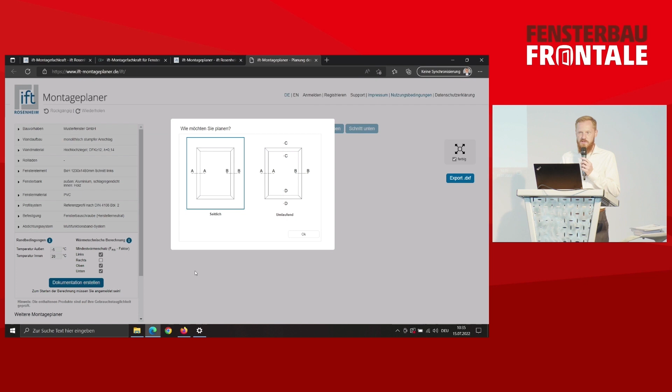Just to explain briefly, what is that actually? Well, this is an intelligent configurator in order to plan the connections of individual construction components. All of this is also very easy to use. It is basically not in need of any particular specialist knowledge. Now, certainly, of course, it makes sense to know your way around what you're dealing with, but regarding the use case and the utilization, it is very simple, and you can also try around things.

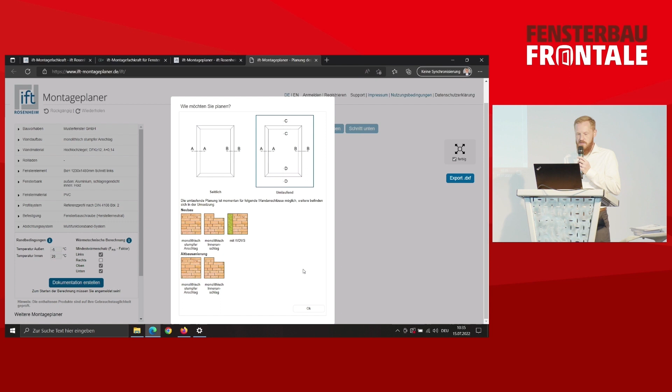Now, we first check in the program whether we want to go around, or what the actual approach is. And you can already see an overview. On the left-hand side, you have the menu. This is the different process. And the end product of all of this is the ift installation pass, or the assembly and installation documentation. This summarizes everything - you've basically proven how you've actually planned the installation.

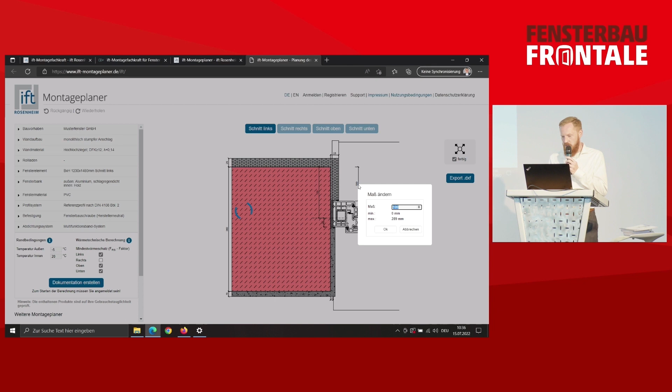Then, of course, you can also see the individual buttons, and you can basically change anything, both in terms of dimensions as well as the window positioning. You can change that dynamically. You can see that here.

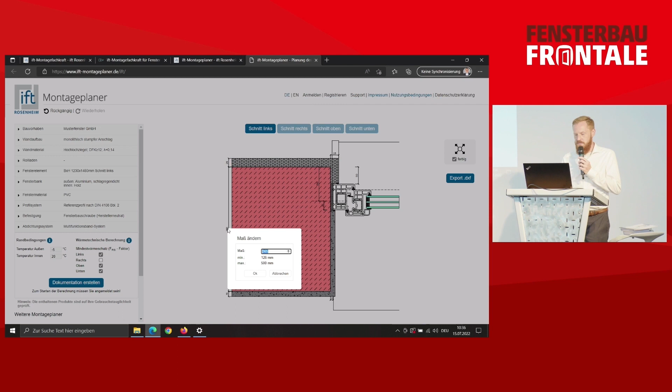We can, for example, push it to the outside, further to the inside. We can change the thickness of the walls, depending on what we need, of course, the thickness of the plaster. In the database, in the background, we also have the heat conductivity in there, and we're using this for a physical calculation to make sure the heat insulation ordinance is fulfilled or not. And then we also have a reference profile, a neutral profile, if you will. You can also have manufacturer-specific profiles. So, of course, we also have the important ones in there.

So, for example, you can also choose the vertical loads, and it's really also about the dimensioning of the fixing units. Then under construction project, we can define where that actually is. We can also align the wind load, which is necessary for the dimensioning of these fixings. And then you can see that within just a couple of seconds, I've actually determined the wind load in Rosenheim for our imaginary construction here. Now, if you've never done that, this is definitely going to keep you up for about half a day just to get that information. It's already in there, and that feature alone is well worth it. It makes your work in the day-to-day a lot easier.

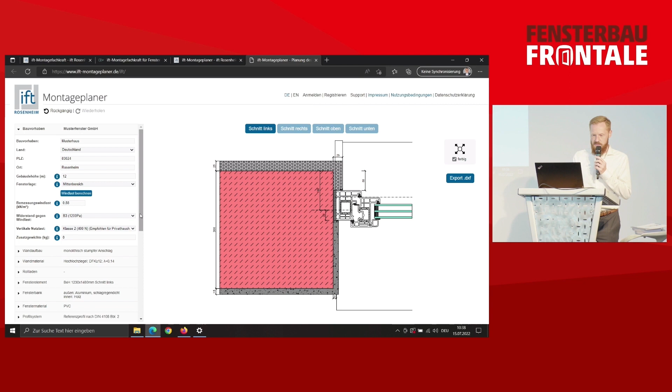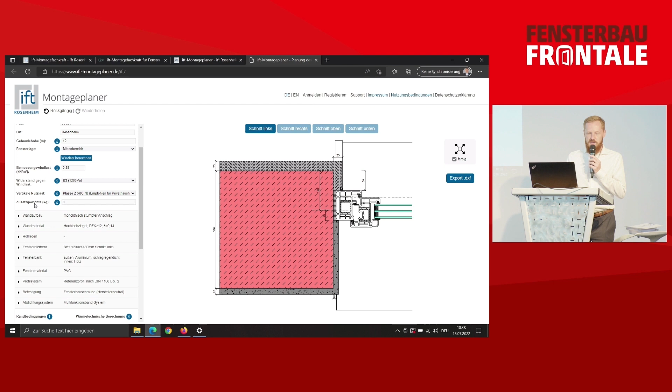So I'm also going to be seeing the vertical use load. This is something that definitely also puts a burden on the wing. This, of course, needs to be transferred into the actual wall. So you can see I've selected private households here. And then in the next menu item, we can also add additional weights, like, for example, to calculate the element weights.

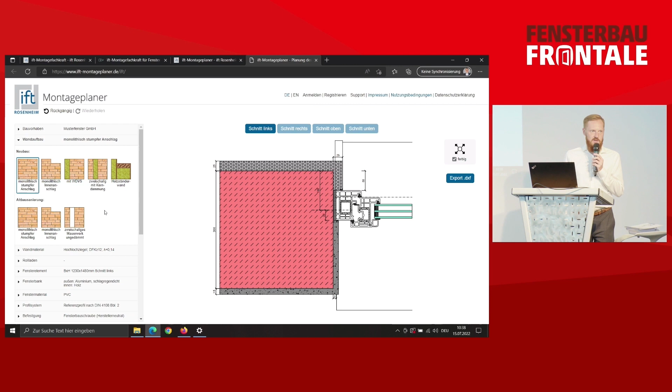And then, of course, we can see the wall construction. We have the respective construction that we always use in Germany. We can select all of those different things. So let's just look at that based on the WDVS example. I'm again choosing the circumference and the planning, and our technical drawing in the middle automatically adjusts to the information. And of course, we can continue to change all of that. We can, for example, change the window position yet again very easily, and look at the individual cross section. So here you can see the technical drawing for the top and the bottom.

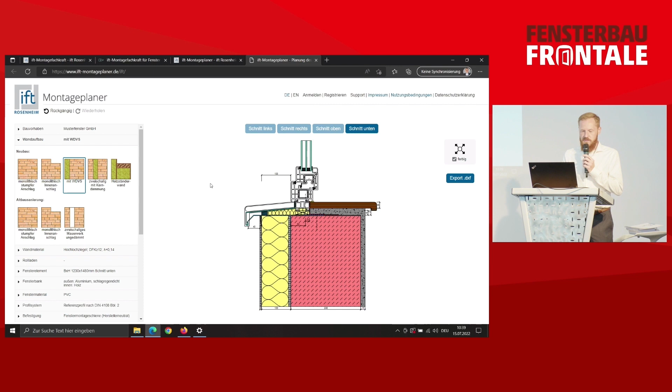This is relatively new in the program. We're continuing to enhance the capabilities—these are very big projects when it comes to the actual programming. We're also working on adding new features all the time, like I just said.

The next menu item is the wall material, which I've already mentioned. You can select any material you want. We're currently in an IFT neutral version, so we're working in a product-neutral way. The program tells you we need a window construction, a neutral one, and then you'll need to contact the respective manufacturer and choose the right product. However, below the menu there are also some links.

You can see that here—this is on the specific versions of the IFT planner. This is where you get automatic product recommendations, which could work in this situation as well. These products are assessed and reviewed, so either us or other review institutes determine the quality of this material in the wall, like certain dowels in concrete with a certain edge distance.

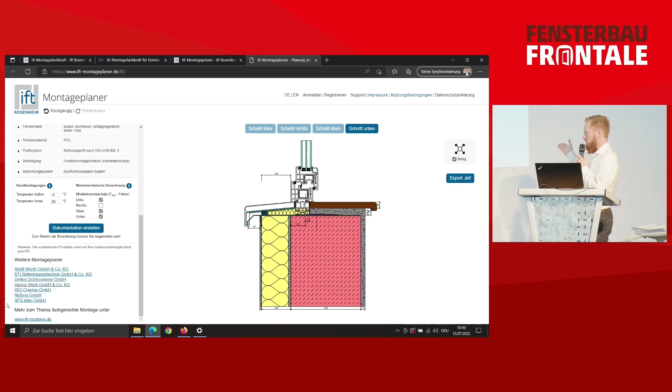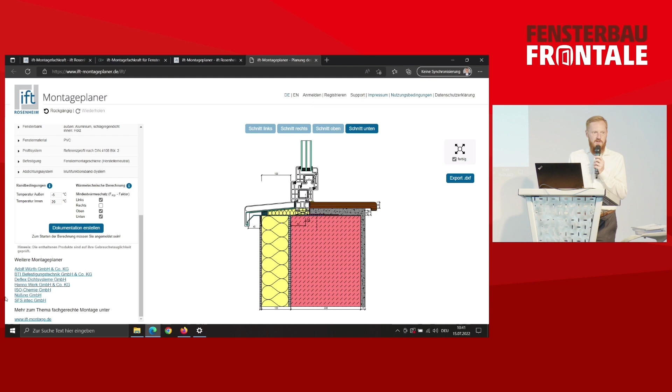These load values are in the database, and the program will further determine whether this all works or not—for example, can the wind load actually be transferred into the wall via the construction? If yes, it's good. If no, you can optimize the dimensions of the fixings. The program either tries to reduce the distances, or you simply use an alternative fixing—for example, if a screw isn't enough, you'd use a console or a rail to assemble all of this.

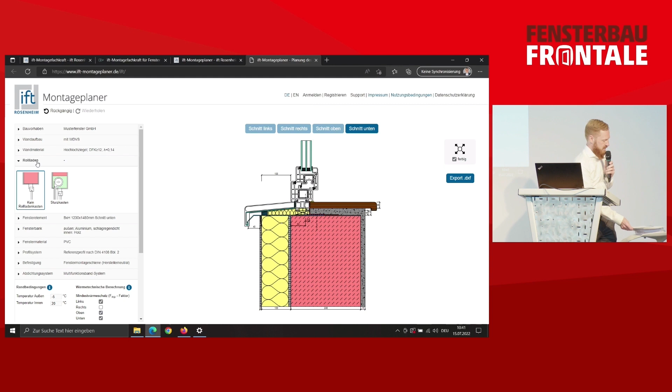I'm going to demonstrate the neutral version so you get a quick overview of the program. We can also add window blinds—these are all neutral ones. I think for window blinds, the big thing is that you need a three-side fixing, which also means that according to the assembly and installation guide, we have to dimension the fixings.

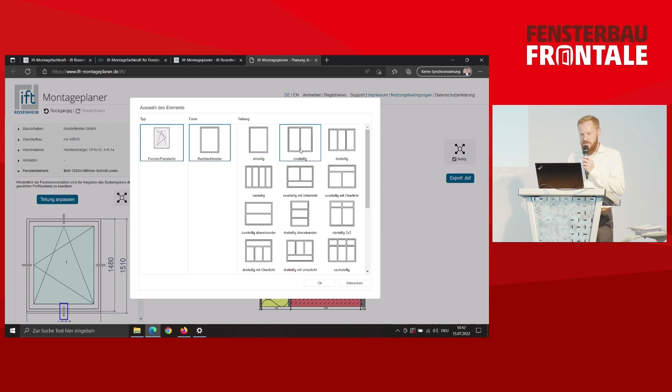But we'll leave it at the standard for now so we can demonstrate it quickly. When it comes to the window element pane, we can work on that, and as long as everything stays at a right angle, we can do that very quickly. So I can choose a two-part element, which has an effect on the wind load and also on the weight.

If I click on this field, I can choose the opening type as well as the type of glazing for the windows, and this can all have an influence on the horizontal load. For example, if you open the window, you have a lateral force applied to the screws, and you might also have an axial load.

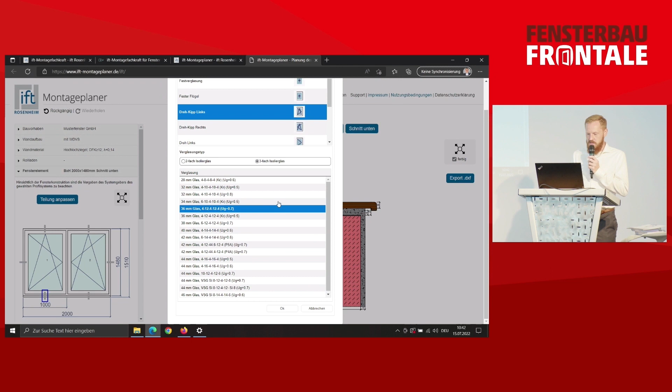Now all of this is done automatically in the background. You don't need any theoretical knowledge about any of this, so it's pretty helpful—it makes it a lot easier when planning your installation. I'm going to leave this at the standard now—unfortunately I'm not very used to doing all of this with a trackpad, sorry, I'm trying my very best here.

Next, we can define a window sill for the outside and the inside. The inside one is mainly just for completeness's sake, but it doesn't really have a major influence on our heat-technical calculations. External window sills, however...

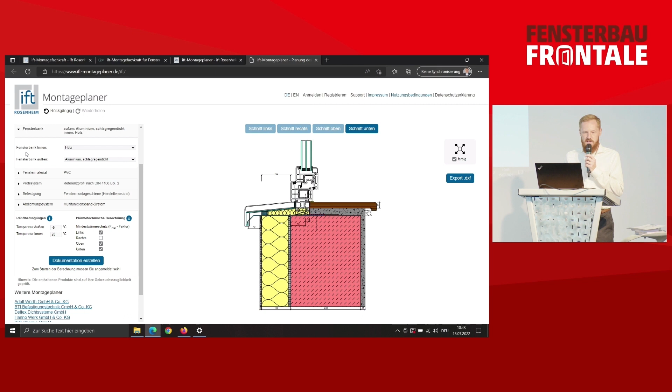You can select different window sills that may or may not be better for certain types of rain. This is also hugely important—if you have a non-rain-proof windowsill, then we need a second level to compensate for that, which guides the water. Here you can see that second level, and we also have these so-called sponges in there.

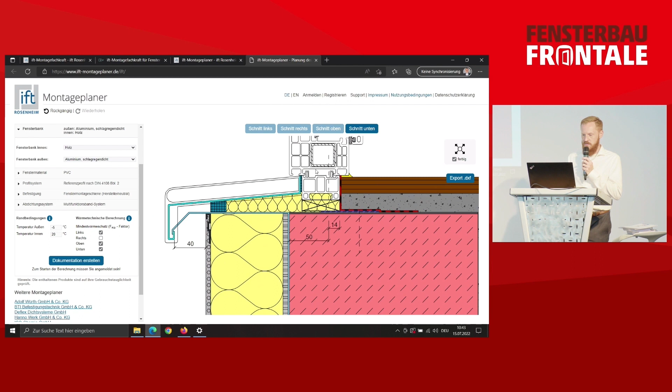This is again for driving rain specifically, and you can see we've just changed it, so you can see how all of this works below the window. All of this is done automatically without any theoretical knowledge needed.

Different window materials can also be chosen—the usual ones: PVC, wood, aluminum, or wood-metal. We can also define a frame color—that's not just for the visual element, it also has something to do with the technicalities of it all.

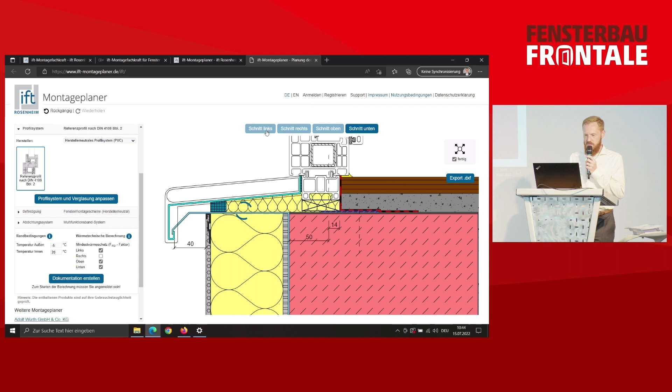We're also doing the dimensions for the joints, which depends on the frame, the window size, etc. So we're basically defining the minimum necessary joint width so the window doesn't get caught up in the wall, trying to really avoid damages—and of course, as always, this can be done automatically.

Of course, you can also make the joint bigger if you want, and simply type all of that in manually. As I've mentioned, we have a standard profile system, a manufacturer neutral system, but of course you can choose from many different manufacturers.

Amongst them, there are, of course, various profiles available. You can also choose different frames or wings, and you can type in the respective weight to calculate the overall weight of the window element.

Core topic of the installation planner is, of course, the planning of the installation, but then also the sealing. So now we're moving on to the most important menu items where you don't really need to do much, because the program does a bit for you here. So we have the fixings.

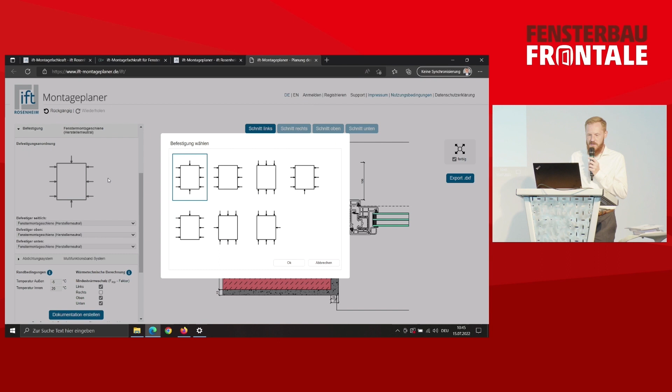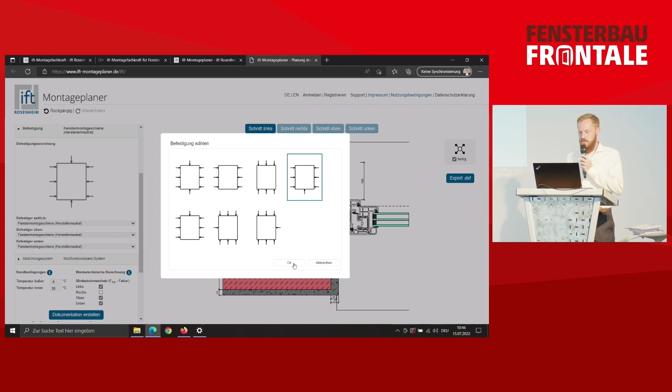We can also click on the diagram on the actual image for how you want to do that. Do you just want to fix it laterally? Do you want to fix it around the circumference? You can basically do whatever you want. Here you can also see that it can take place on two opposite sides, but we are now going to fix it on three sides with no fixing at the top.

According to the assembly and installation guidelines, we also have to determine the dimensions. If there is no fixing at the top, these wind loads basically have to be transferred via the side elements.

And with that, we're basically breaking down the window element into different surfaces. They are allocated accordingly, and then we're calculating the respective load for the individual points with the respective carrying load capacities of the elements. It sounds very complicated, but this is actually quite simple. This is what it is.

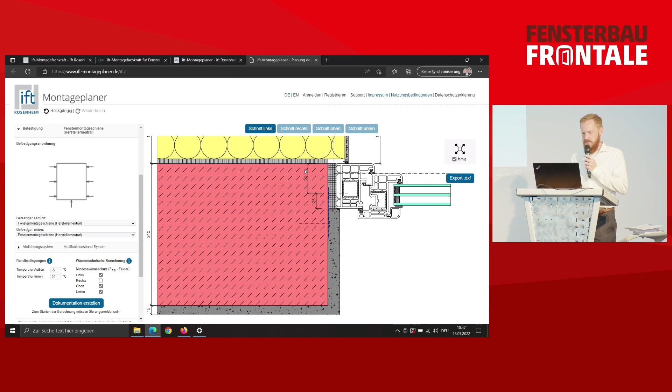Now, to explain it briefly, here we're assembling an installation track. But why do we need this track? It's because our distance to the outside of the wall is not enough for a screw.

So this is according to the installation guide recommendations. We've entered this into the program, and the real products are assessed and reviewed for different distances, and they're also stored in the program. So here we can't actually pick a screw. The program will also not allow you to use a screw, and will immediately switch to a rail or a track.

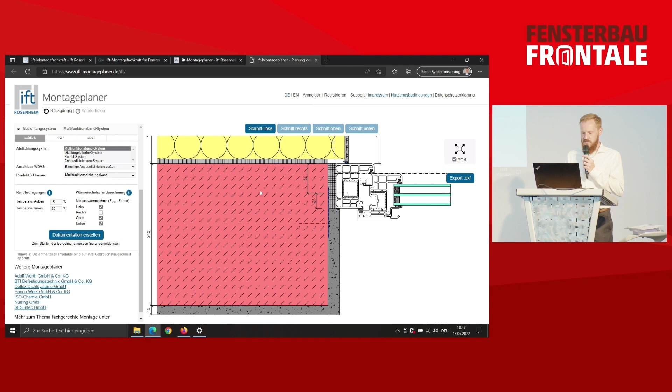Moving on to the sealing and insulation system, we are choosing from pre-entered systems. Of course, we're always making sure that there are no errors in the actual calculation in the software. Here we have an external plaster edge, but of course we can choose different systems.

We can also choose different sealing strips and insulation strips. Here you can see it's inside as well as outside, but we can also deactivate this particular strip. This is simply an additional sealing during the construction phase, just to make sure that no damage occurs.

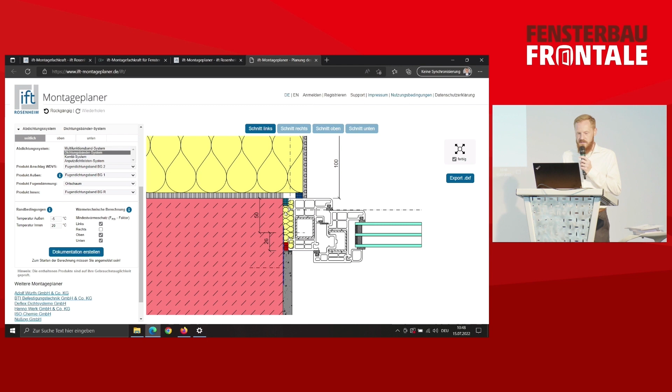However, if you want to deactivate it, you can actually deactivate it right here. This is the product out external, so here it's optional, and now it's simply gone. So we basically foamed the entire joint.

So let's just say, okay, we're happy with this particular window insert. Then we can create the installation documentation. We can also change the framework details. This is basically standardized, but of course there are also other requirements, so you can type in the respective values that you want.

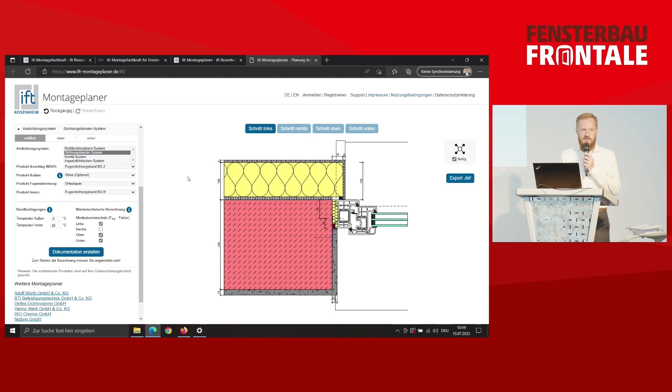We also have the thermal calculation, which you could deactivate - it's not really necessary anymore. This is simply due to the fact that this calculation usually took relatively long, around 6 minutes, but now it's mostly done in about half a minute, 30 seconds.

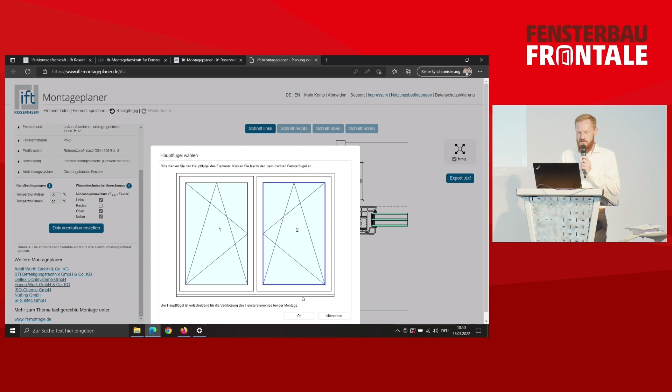I clicked on create documentation, so now the program tells us to pick a main wing. This is, of course, important for the actual allocations and the different blocks and logs. Let's say the second one is the actual window.

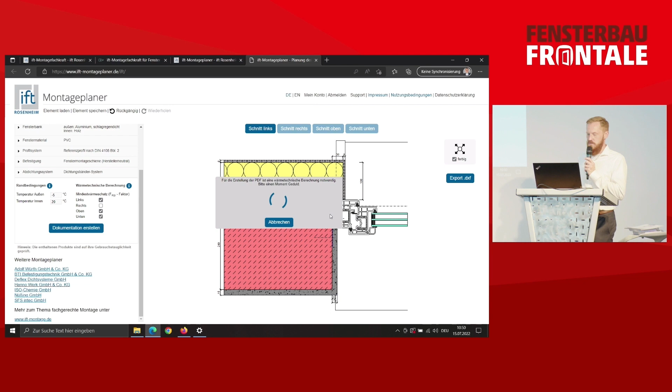So now we're doing the FEM calculation. They're seeing if all of the protective measures are fulfilled. If not, then there are some tips as to how you can rectify this, like working on the insulation or repositioning the window elements. In this case, everything worked, and we can download our installation documentation, and here it is.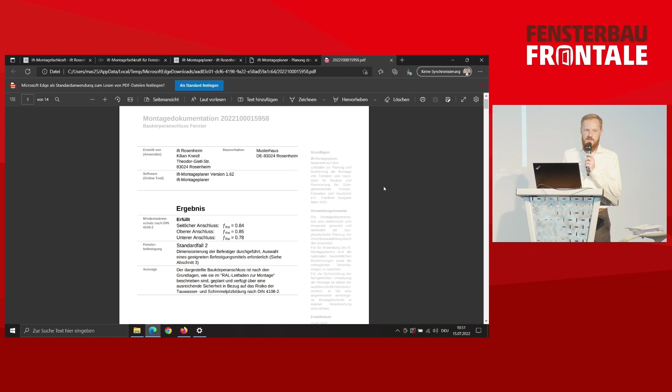This is where we have all of the information summarized from the program. It's in a PDF. We also have the information on whether the minimum heat insulation has been fulfilled, and of course we're separating the individual cases, standard case 1, standard case 2, through the non-circumference installation or the additional loads that we have in standard case 2.

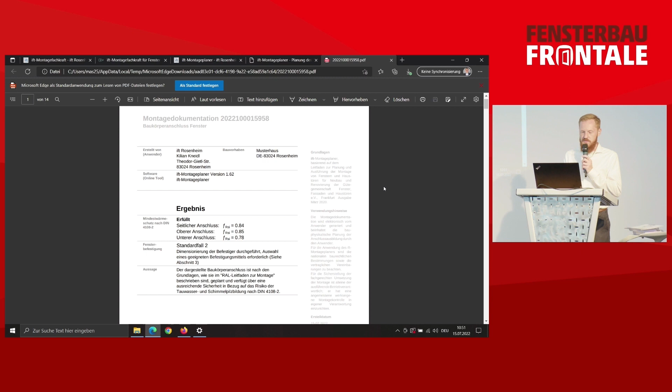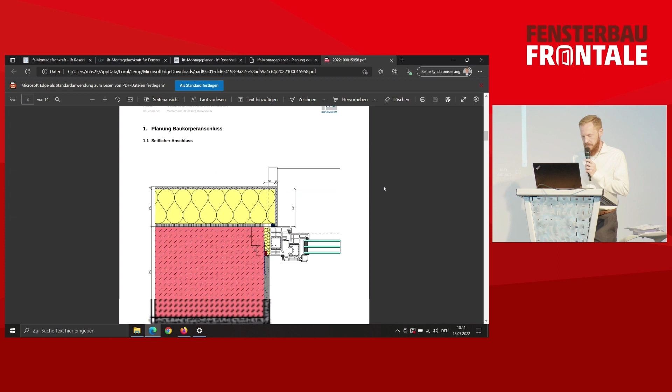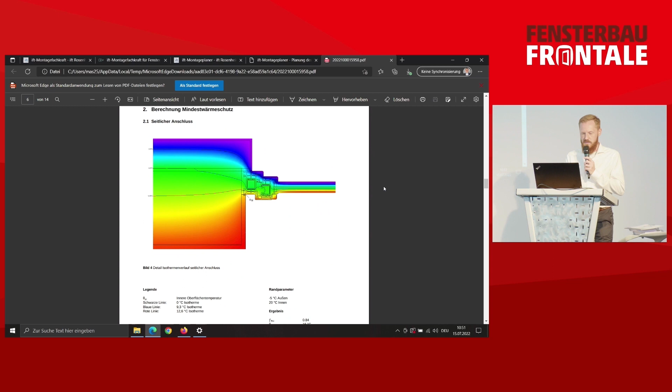This is the dimension of the means we talked about, establishing the dimensions. Then you can see the summary of all the different materials and products required for the window installation. The technical drawing is also here, for all 3 connections. And then also the thermal calculations with the calculation of the FRSI factor and the minimum heat insulation.

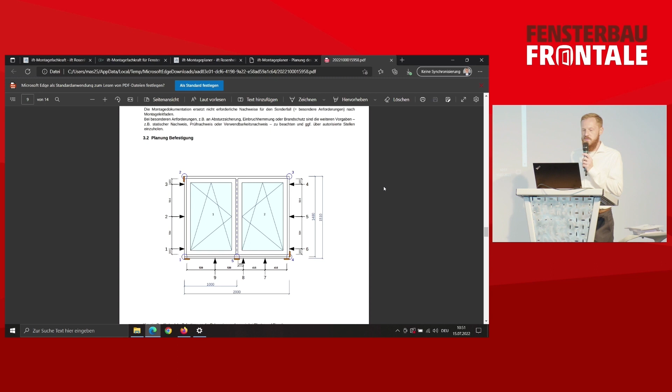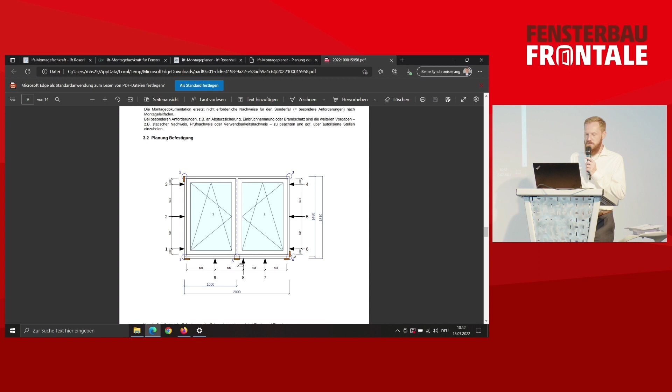Now, of course, we have the window fixing. Right here, the program automatically calculates where the fixings have to be positioned, with the respective distances, how many you need, and which fixing products you need. According to the RAL installation guide, we've also logged the main wing without any fixing at the top, like we said.

And on the following page, we have all the different loads listed according to the individual directions. And here we've got neutral products, a neutral window installation track.

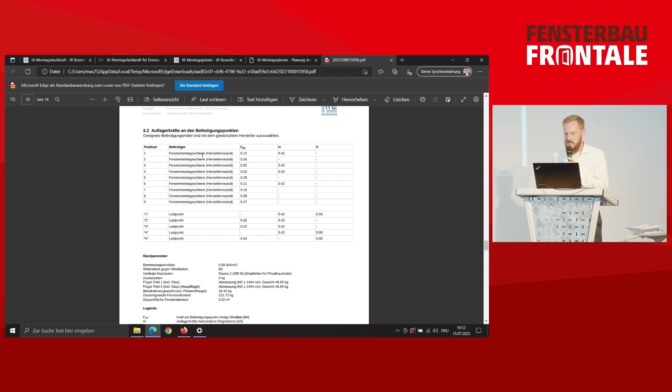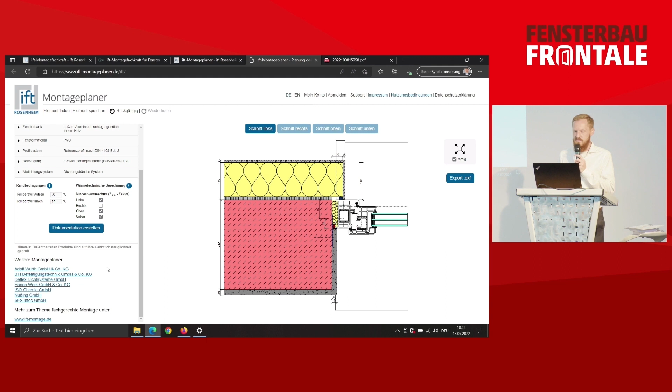Now with this particular ift installation guide, you can go to the manufacturer and request the individual fixings for the respective loads in this particular subsection. But if you're working with the company-specific version of the assembly and installation planner, we will recommend the right products for this particular installation situation.

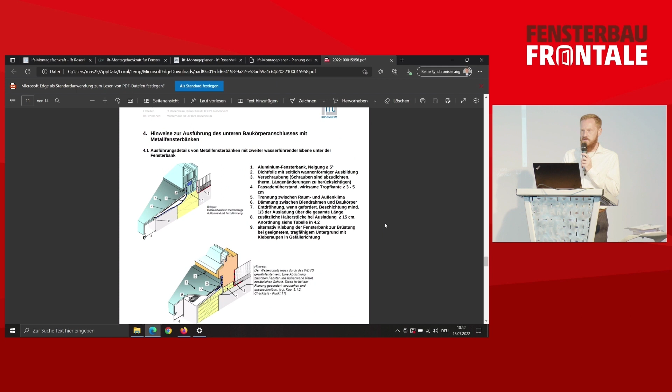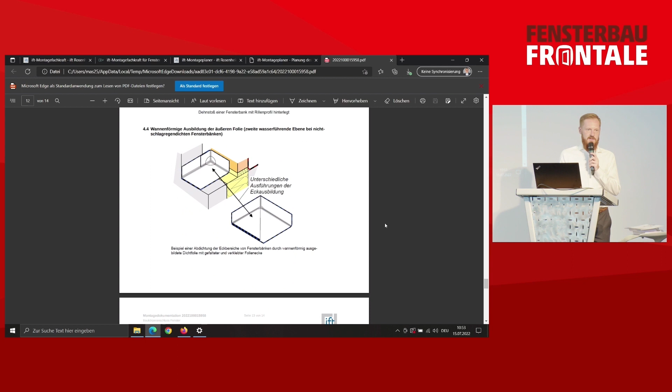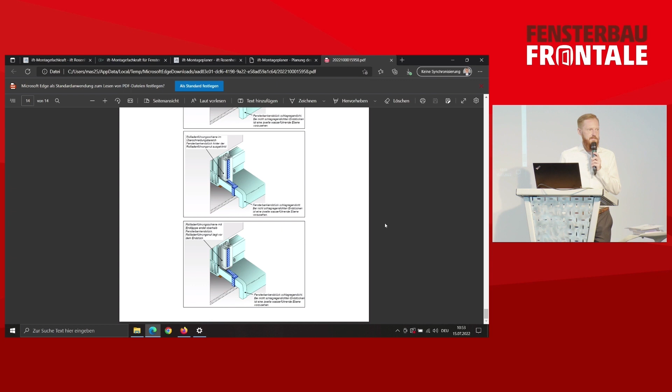And now to wrap things up, we also have additional tips for the sealings and for the fixings. We can also see additional elements for the window sill, should it be longer than 1 meter, as well as the water guiding levels. And if you're planning with specific products, you can also see the data sheets on the products used. Thank you very much for your attention.